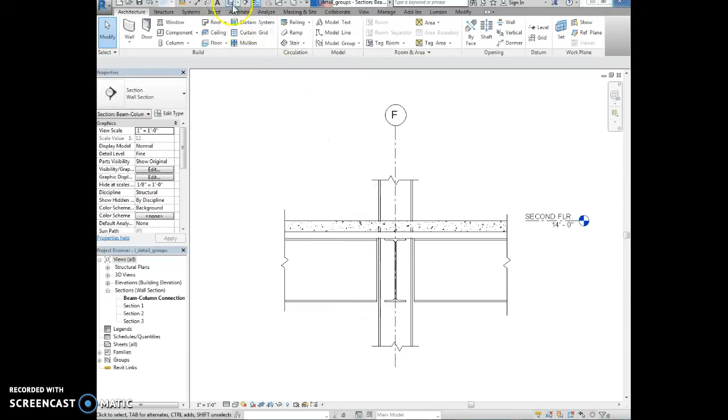Okay, so to start, we're going to activate the beam to column connection, which is this right here. Here's our column, here's our beam. We want to activate the annotate ribbon, and we want to select the detail component tool. We're going to select the load family from the mode panel, and we're looking for the metal fastenings folder. So that's going to be under detail items. And then here's all of our divisions from MasterFormat. And we're going to select division 5, which is metals.

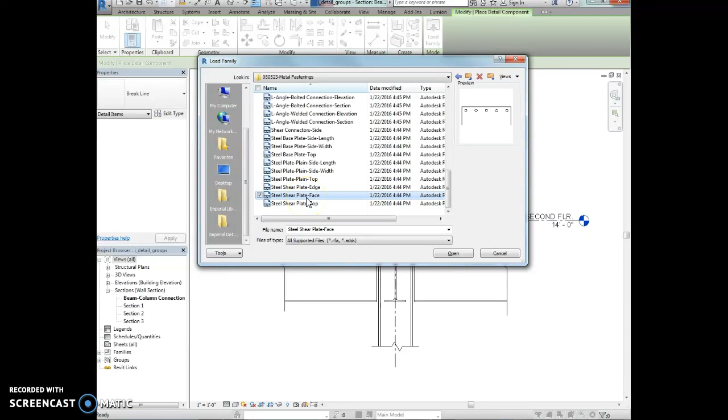And we're looking for 050500. Where am I? Oh, here we go. And then metal fastenings. Here we go. We got it. And we're going to open the steel shear plate. Okay. So a steel shear plate face. Right here. And we're going to say open. Alright, great. So now this is the face of a steel plate.

We're going to hit the space bar to rotate this thing around. And we're going to come over to the left side of the column, and we want to place this so it's on the center of the column. Alright, so about there. Very good.

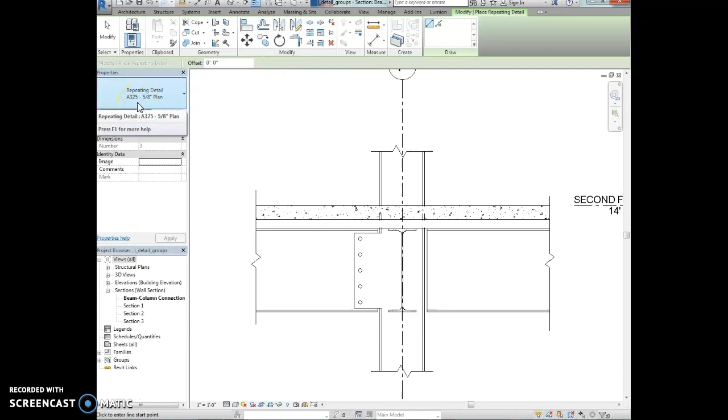And then I want to activate the annotate ribbon, and we're going to select a repeating detail component, and we're going to select the A325 5/8 inch plan detail on the properties pane. We're going to select edit type, and we're going to set the layout to a fixed number. And these are bolts that we're putting in here, by the way. We're going to say OK. Okay, so in the properties pane, we're going to change the number to 5, and we're going to press apply.

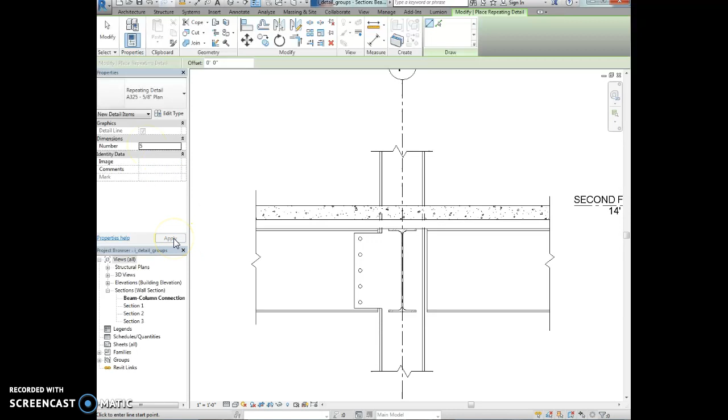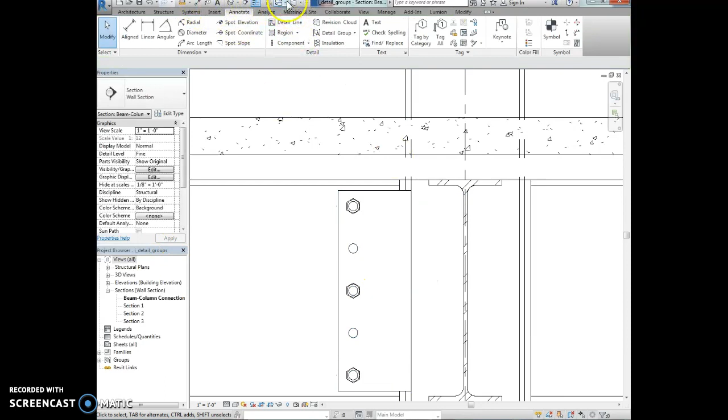And then we're going to place the bolt in the bottom hole, and then we're going to pick the top hole. Oh, and for some reason it changed from 5 to 3, so I'm going to say apply. Oh, and I got to do that again. Hopped right out of that command. Sometimes that happens, so I'm going to hit undo. Let's do that again. Repeating detail.

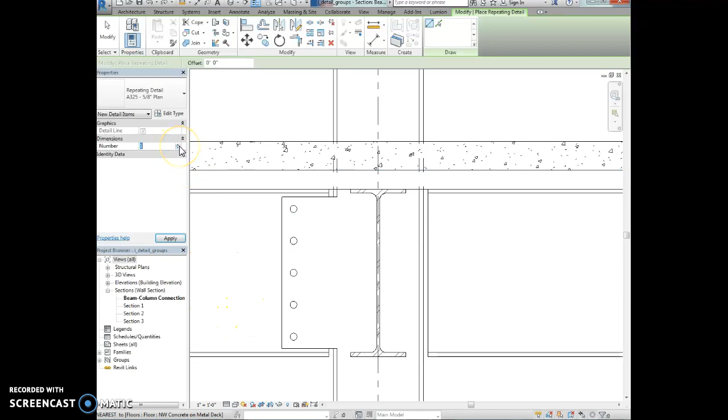Okay, 5. 5 and apply. There we go. Oh, does not want to do that. 5 and apply. Oh, boy. It really doesn't want to go 5 for me. Well, let's try it again. It keeps just putting 3 in. Well, that's quite interesting. What about if I try to raise it now and apply? There we go. Do it after the fact. I tricked it. Sometimes you gotta do those things. Alright.

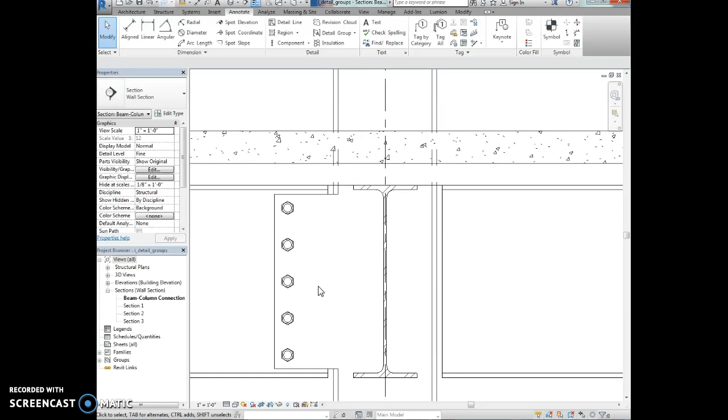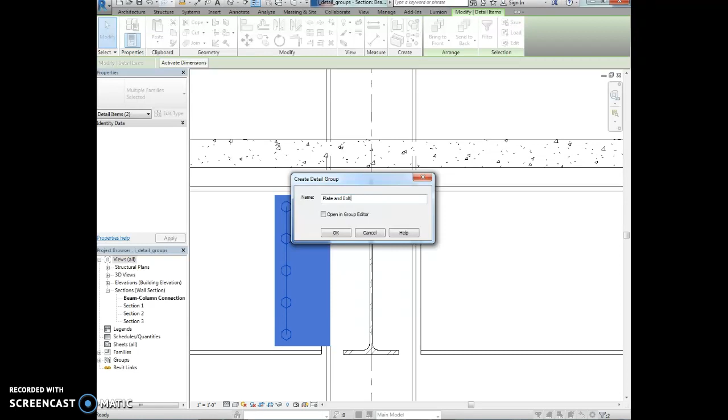So now we're going to window around the steel plate. So this steel plate here and the bolts to select them. So now I have the plate and the bolts. And I want to select a detail group. So up here, create a group. And I want to call this group plate and bolt. And what this is going to do, it's going to lock all that information together. And I'm going to say OK.

So see how now it made it one group. So the bolts and the plate go together. In the browser, I'm going to locate the detail group. So over here in the browser, if I look under groups, I'll see detail group, and then there's plate and 5 bolts in section.

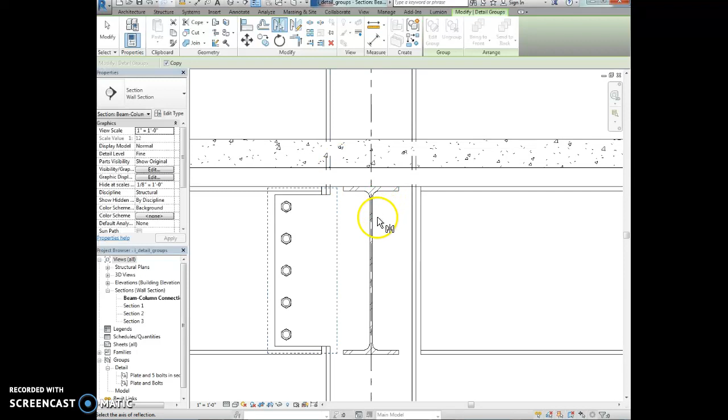I'm going to select the steel plate here, and I want to mirror pick axis, and I want to pick the center of this column. And then it completes the mirror command. Now I'm going to locate the plate and 5 bolts in section in the project browser, so right here.

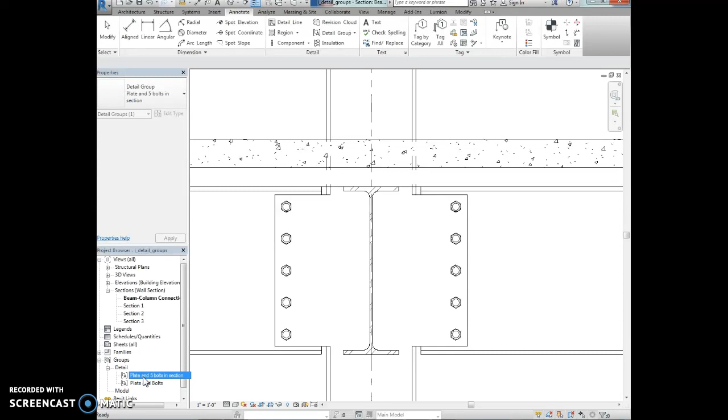And I'm going to drag and drop them into the locations shown. So I'm going to drag and drop them over here into this location. So it's like right in the column, and click. Oh, I moved them slightly. Okay, that's all right, you can move them up. Alright, so now I have some bolts going through each one of these objects.

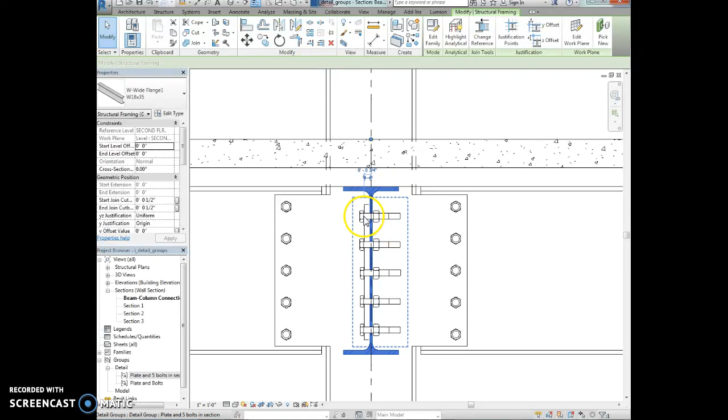So this is a wide flange beam, so actually in 3D this is coming towards you. And then these are some bolts through that, and then this plate is bolting through this other wide flange beam that's running. Well, you can see it because you can see it running along its side.

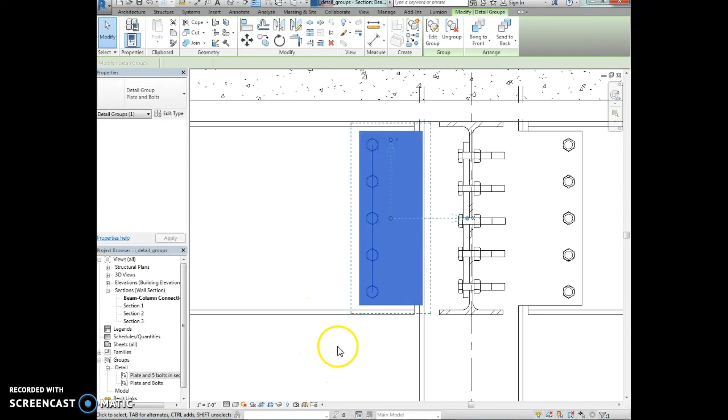Alright, so that would be the end of that exercise. And actually what I just did there was I clicked on this and moved this over a little because I can't see the edge of that column. So there we go. So that's the end of that one. So go ahead and save that.